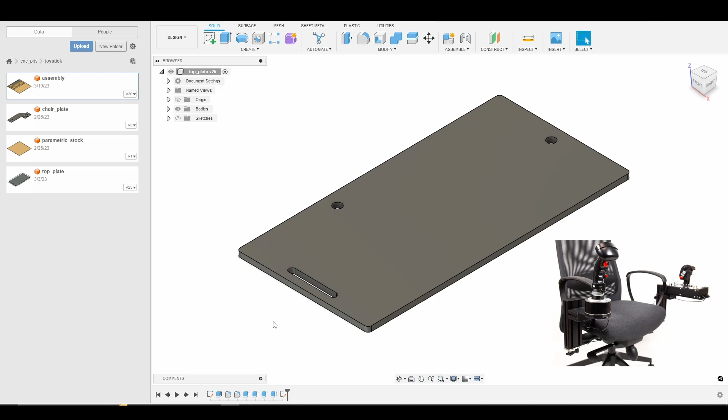So one of the challenging parts with this project in particular was that I'm using pretty much the entire X and Y envelope of the Tormach just to hold the aluminum plate. So I was using a piece of aluminum plate that's 12 inches by 12 inches and 190 thousandths thick, and that would essentially allow me to mill out one plate and then turn the entire piece 180 degrees, and then use this empty side over here to create another, so I could get two parts out of one piece of plate.

Again, the hard part was it's 12 inches by 12 inches, so really the plate itself was taking up almost all of the work area envelope of the 770. So what I ended up doing is taking an approach that I used to use a lot when I had a CNC router. Used to have an Avid. I got rid of it because I hated Mach 4.

So for work holding, what I did is I took the plate and I used double-sided tape and adhered the plate to a piece of MDF, and then used toe clamps to hold the MDF down and keep the plate nice and flat, and that allowed me to make these parts. Ran into various issues with that, and we'll discuss those in a minute, but for now we'll just briefly walk our way through the CAM.

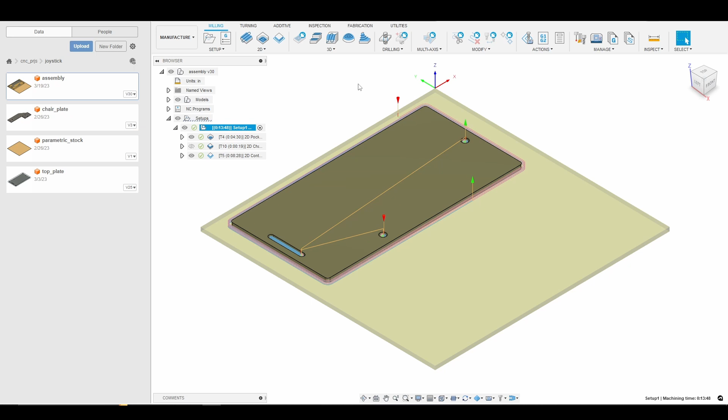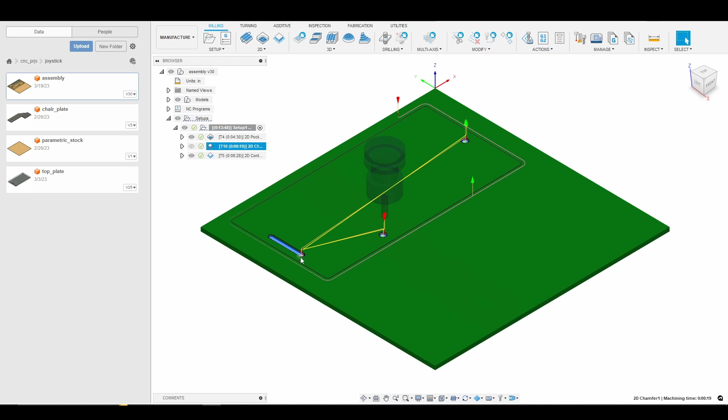It's very simple. So we have a pocketing operation where we make our holes to mount our joystick, and then mill out the slot to attach to our aluminum extrusions. We then just chamfer. So we're just using a 1/4 inch chamfer mill here to break the edges, make sure there's nothing sharp. And then finally we use a 1/4 inch end mill, and we just do a 2D contour.

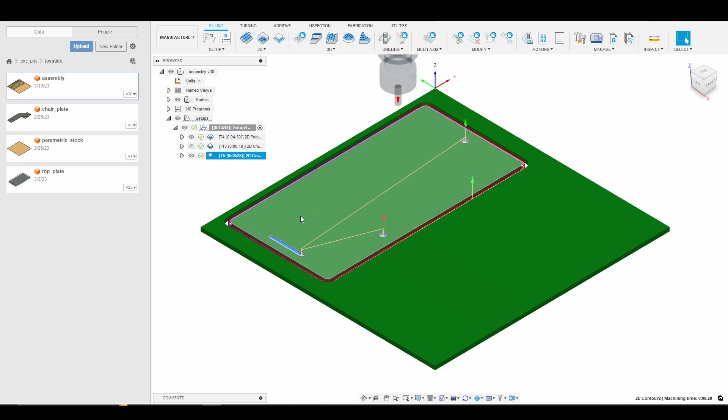I'm not using tabs because, again, the double-sided sticky tape is holding the part down. No need for tabs. So we just go through and mill out the entire contour on the outside of the part, and then that allowed me to pry the part up with a simple flat screwdriver, and then I was finished. So that's it for the CAM side of things. Again, the hardest part was really just the work holding itself, and so we'll go into that next.

Alright, so for this flat material, the way that I'm holding it is with some carpet tape attached to a piece of MDF, and what I will do is I will put this against some dowel pins in the Tormach using the Saunders fixture plate, and then I will use some TeCo toe clamps to hold the MDF in place, and that will give me a nice easy way to hold this flat piece of aluminum plate. It's 190 thousandths thick, without needing a vacuum table.

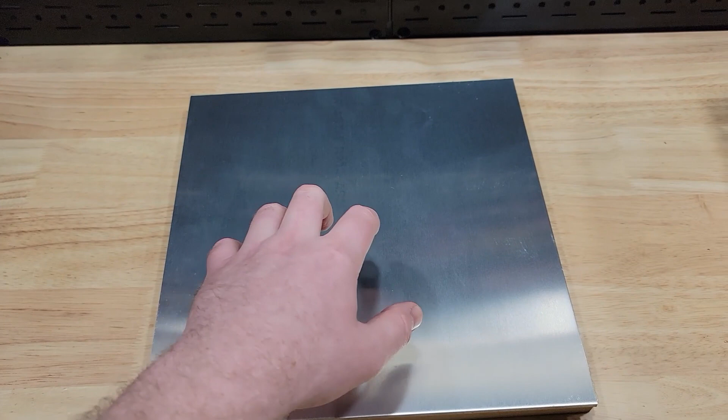And so this takes me back to my CNC router days. I used to hold a lot of flat material like this, acrylics, plastics, aluminum plate. So that's what we're going to be trying in the Tormach. Alright, so here we are at the machine.

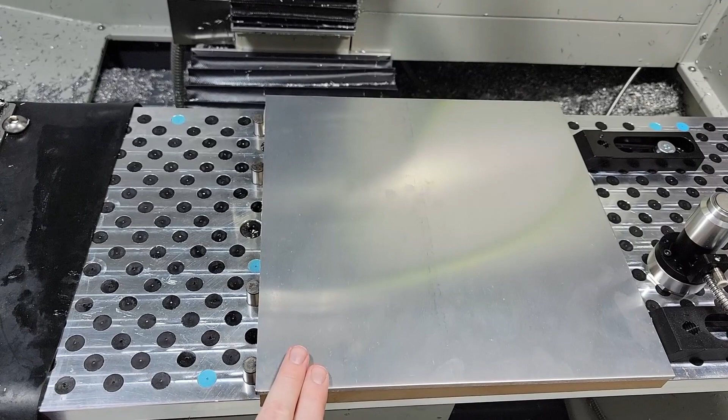I have my 190 thousandths aluminum plate taped with carpet tape to a piece of MDF, and then I'm just using the precision dowel pins that come with the Saunders fixtures so that I have a nice straight edge here.

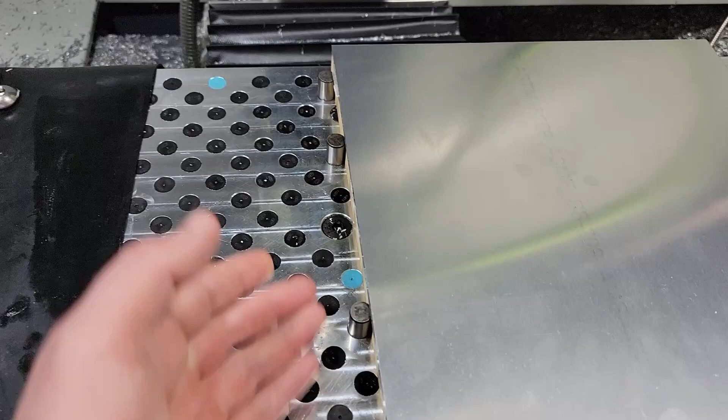And then here we go, I'm just using some toe clamps to push the MDF up against the precision dowel pins, and that will give me a nice firm work holding method for cutting this plate, you know, especially when it's so large that I can't use a vise. I don't have a vacuum fixture to hold it.

This takes me again back to my CNC routing days when I used to own an Avid, and I would use carpet tape to hold down aluminum and other materials. So I hope that helps.

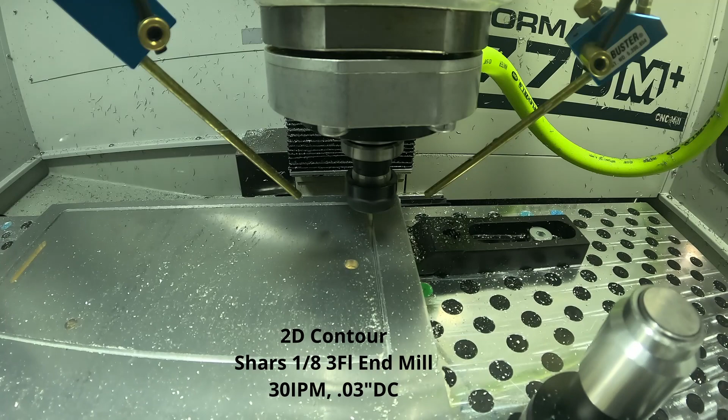Alright, so now we get into the first issue. I'm using a 1/8 Shars end mill just to try to contour around the entire part and cut it out. And unfortunately my end mill didn't hold up, and here in a second you'll see it shatter. There we go, so it broke, and that was the end of my end mill.

Later I did decide to go ahead and use a 1/4 inch end mill instead, just to make sure that I would not break an end mill, and that led to more problems, which we'll see in the next clip.

Alright, so now we get into the second issue. This time I'm using a 1/4 inch end mill, and again I'm doing the contour around the outside of the part just to cut it out of the stock, and I'm going way too fast for this work holding method.

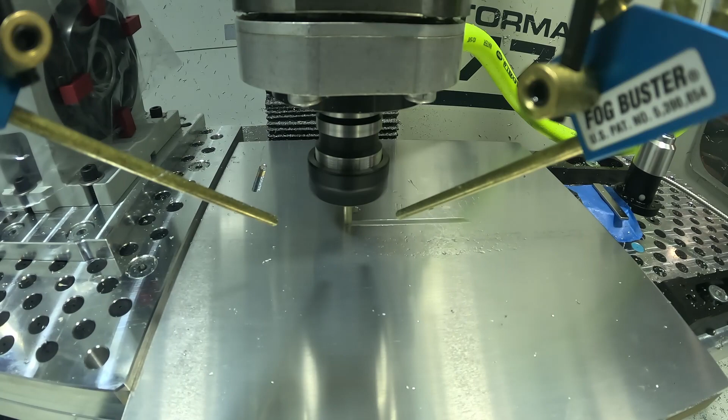I'm going 60 inches per minute, and as you'll see here in a minute, I don't have dowel pins in the Y direction, only in the X. In this case, actually I have my 4th axis on, so it's butted up against the 4th axis plate.

So without anything keeping the part from shifting in the Y direction, you'll notice by going 60 inches per minute, I actually move the workpiece, which causes chip welding. I ruin my end mill and I ruin my piece of stock, so I was not having a good day in terms of making this part.

And what you're not hearing is the cursing that is taking place on the other side of the camera.

Alright guys, here's the final crash, and this is just stupidity on my behalf. So after the crash in the previous clip, I just rotated the fixture 180 degrees and then went to town trying to make a part again.

I didn't realize that when I crashed and I moved the entire fixture forward, I actually caused some of the tape to give out, and as you'll see here in a minute, the entire workpiece sort of pulls off the MDF, and I believe that was because, again, all the force in the Y direction when I crashed in the previous clip just caused some of the tape to lose adherence and it wasn't secure.

Hindsight, I should have removed the piece of stock, put some fresh tape down, or at least pressed down on the top again to make sure everything was still adhered. I didn't do that, and it resulted in a crash that could have been avoided.

I think in the future I might add screws to the 4 corners of the plate just to make sure that it can never lift up. I haven't had issues with double tape giving away before. That was sort of the first time.

Another thing to note is in the future I would like to try vacuum work holding, particularly with a Pierson pallet or a Pierson vacuum fixture, and I think that will be a better workflow than using the double-sided tape. But when you're just trying to make a couple parts, you use what you have available.